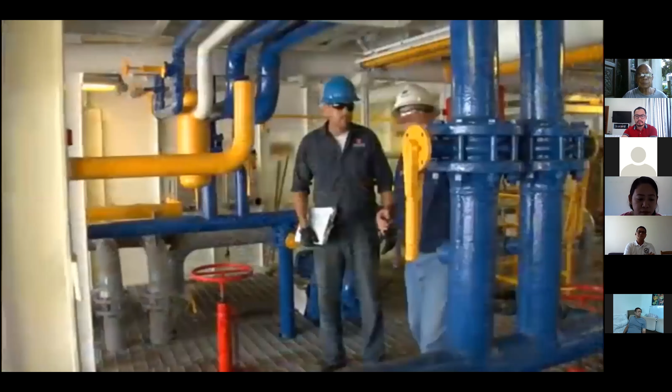While health risks from exposure to low levels of NORM are minimal, the extraction and production of oil, natural gas, or minerals can cause NORM to accumulate in hazardous concentrations, harming internal tissue and organs.

There are 3 basic exposure pathways, or routes of exposure, by which NORM can affect the body. Radiation is the process by which energy is given off in the form of particles or electromagnetic waves.

When unstable atoms decay, they emit radiation as a byproduct. Surface contamination exists when radioactive material is deposited onto a surface.

When ionizing radiation damages cells in the body, the effects can be both short-term or long-term. The most serious long-term effect of radiation exposure is an increased chance of developing cancer.

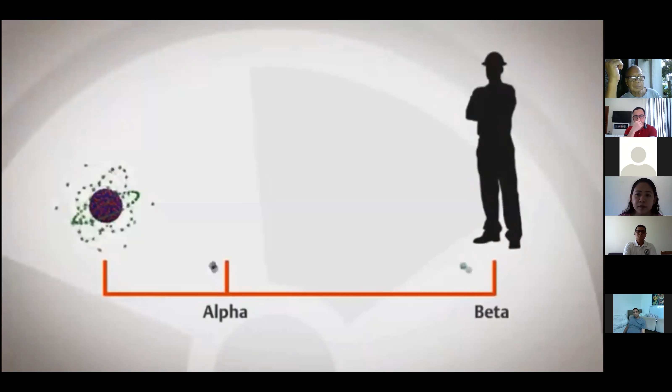When the DNA of a cell is damaged by ionizing radiation, there are 4 possible outcomes. In relation to norm, exposure describes the amount of radiation that is traveling through the air.

Dose describes the amount of radiation absorbed by an object or person. OSHA has set annual radiation dose limits for workers that are occupationally exposed to radiation.

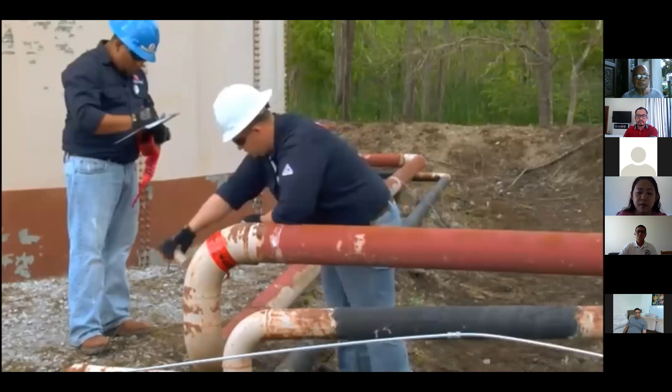Radiation protection programs are required to inform employees when radiation hazards exist, provide sufficient safety training, and supply PPE and protective clothing. To measure radiation levels in the workplace, norm surveys must be conducted and documented by authorized personnel.

When leaving a norm-contaminated area, a full-body scan, known as frisking, must be performed to check for contamination. The low levels of radiation that we are exposed to do not usually present hazards.

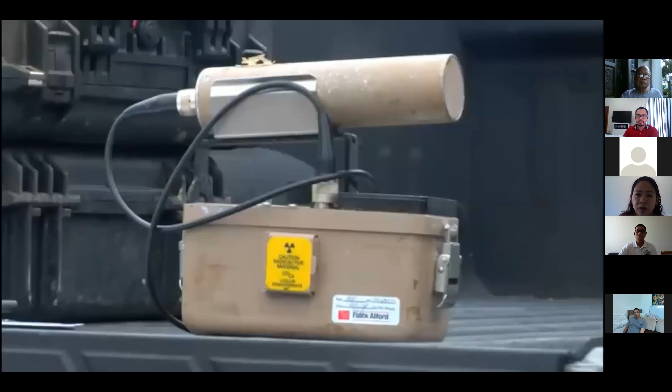While norm rarely poses an immediate danger, hazardous concentrations can accumulate in the body due to chronic exposure. By being aware of norm in the workplace, knowing the current radiation levels, and using control methods, occupational exposure can be kept as low as reasonably achievable.

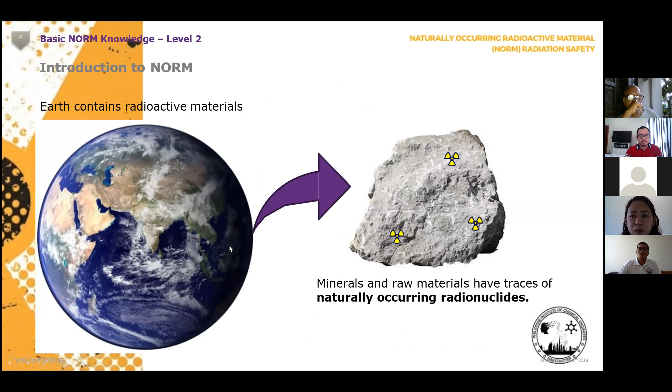So what is NORM all about? Radiation is everywhere - we call it background radiation. It is minerals with traces of naturally occurring radionuclides, which we call natural radioactive materials. So we are continuously exposed to radiation, and 80% comes from natural sources.

This might be radon gas, a very radioactive gas liberated through the surface of land, which can get trapped inside houses. It's around 42% mostly around the world in areas with huge deposits of uranium. Also in food, we have food accounting for 9%, in the form of potassium-40.

So we ourselves are radioactive materials - we possess NORM in our body, as well as soil, and cosmic radiation. When we travel in space, we also receive radioactivity coming from space.

The rest, 20%, is artificial, coming from our medical facilities. So there's a pathway for how NORM is created from its parent radioisotope, uranium - the most stable one is uranium-238. Usually natural radioactive materials only exist at the end of the heaviest element, which is uranium, and the rest is fabricated artificially in the lab.

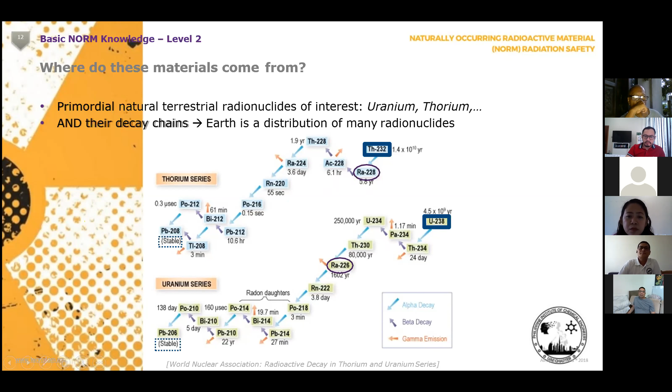So why do we have to bother about NORM? NORM is typically a low ionizing radiation emitting material. However, because of technological intervention, it concentrates and becomes more radioactive due to the volume, and becomes potentially hazardous. So the objective of our waste management is to treat and dispose of NORM as safely as we can.

So why do we have a legal requirement for this? According to IAEA, the International Atomic Energy Agency, certain operations can give rise to significantly enhanced exposure that we need to control by regulation. Meaning, no matter how small it is, it can accumulate through our body as doses.

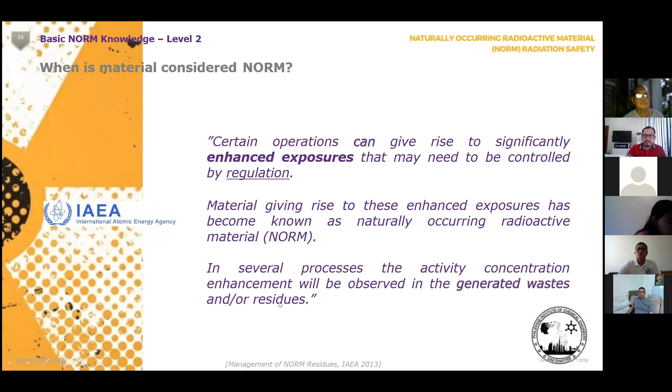So material giving rise to this enhanced exposure has become known as naturally occurring radioactive material, or NORM. In several processes, activity concentration enhancement will be observed in generated waste or residues. This is how IAEA classifies radioactive waste.

It has two characteristics: one is the activity concentration, and the other is half-life. As radioactive material decays according to its half-life, it potentially reaches stability at a certain level, where it can fall below background radiation.

Since NORM is slightly above background level, it is still considered potentially harmful. Because of this long-lived half-life, it is considered that we have to dispose of or immobilize it in order not to contaminate the environment as well as people around us.

So we have to set boundaries for how NORM is considered NORM. The activity level concentration threshold is 1 becquerel per gram. That is what we call background activity. So anything above 1 becquerel per gram is considered potentially harmful, and below it could be safe. We call anything above 1 becquerel a regulated material, and the rest is considered clean.

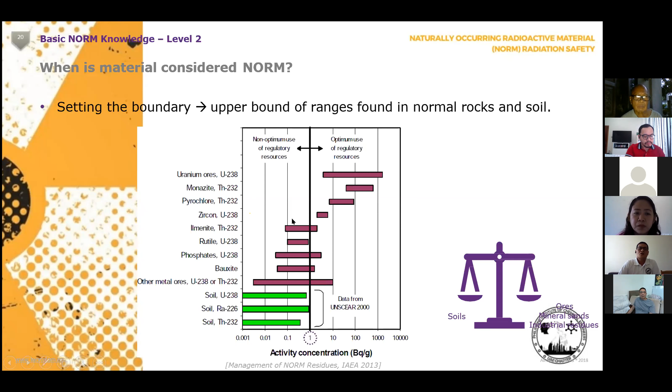According to our regulator here in UAE, which we call FANR, the Federal Authority for Nuclear Regulation, one of the most referenced documents is Regulation 24. It stipulates all the basic safety standards for facilities and activities involving ionizing radiation other than in nuclear facilities.

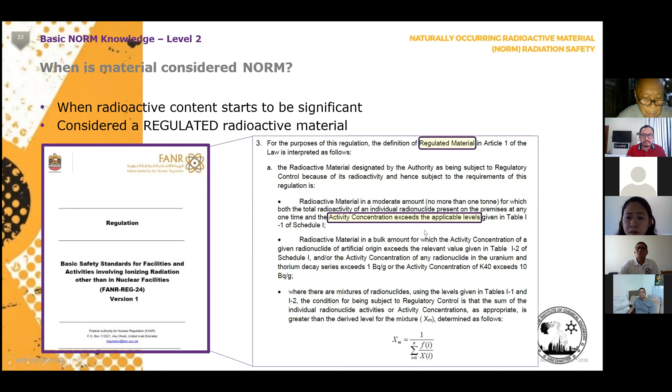Since it states there that possession, manufacturing, handling, storage or disposal of any such material must be under regulation, we are constantly monitored so that activity concentration must not exceed its applicable limits. One of its baselines is anything above activity of 1 becquerel per gram in terms of uranium and thorium chain daughter isotopes; anything above that is considered regulated material, as I've said previously.

So why does K-40, or potassium-40, have 10 becquerel? Because we are more radioactive than our natural background. Mind you, we don't die even though we have such high activity, since it is inherent in food and everything else around us. What matters is the additional radiation that we may absorb or ingest if we become contaminated with any NORM.

So NORM in oil and gas production has two sources. The upstream is exploration, where we provide a path for naturally occurring radionuclides in formation water. In the downstream, it can lead to concentrating NORM, forming sludge in tanks or storage vessels.

So NORM may accumulate in wellheads in the form of scale. It might be on the pipelines, on valves in the Christmas tree, and in oil gas separation it will form as sludge. In gas plants, thin films form as a result of radon gas decay.

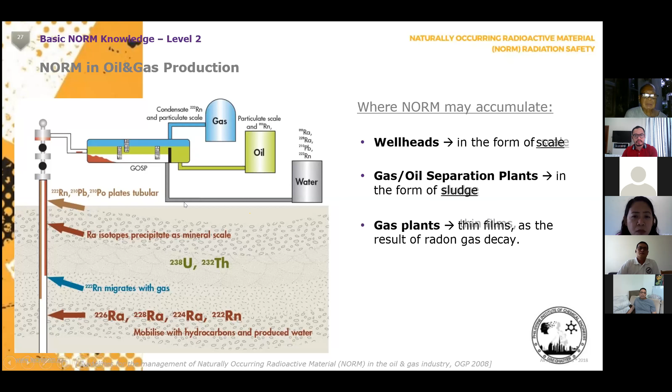NORM can be carried out in two ways. One is by leaching down radium-226, which can be leached as soluble in water, like its counterpart calcium, strontium, and barium, which are typically stable elements, except for radium, which is radioactive. It precipitates out as a chemical reaction from the leaching water as radium sulfate or radium carbonate.

So it builds up scale on the inside of the pipeline, which reduces capacity. Eventually, over long years of operation offshore, they constantly replace pipes because the capacity of oil flow is being reduced. Because of the regulation, they either descale it, or basically the only way is to descale it.

And those decontaminated metallic parts can be cleared, and we can recycle them as well, but not back to their original purpose—they can be smelted down to become a new material.

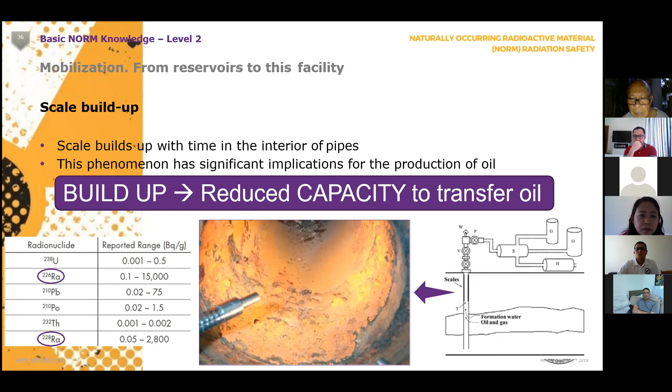So sludge can be accumulated in tank bottoms, gas oil separators, dehydration vessels, storage tanks, and waste bins. Other items in between are called miscellaneous, and these are valves with a very odd shape, which we manually descale in our facilities.

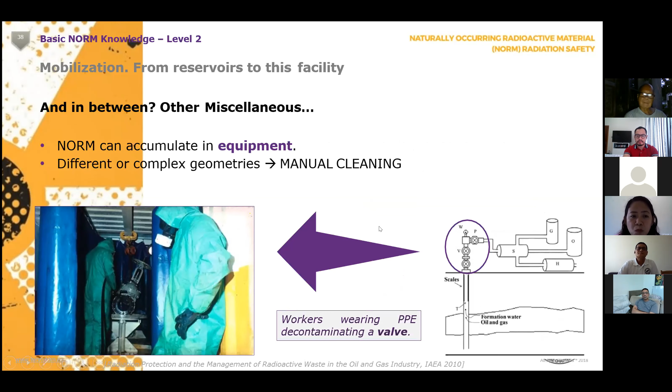So from the two major sources of radioactive waste material, scales and sludge, the third one can be miscellaneous equipment. They can be considered as burnables or non-burnables.

Upon accepting it in our facility, we have to make sure they can be characterized as dictated by the regulation. Any analysis data provided by OPCO as per Waste Transfer Protocol, or WTP, must be verified by radioactive waste characterization. We use special equipment called high resolution gamma spectrometry to detect very low ionizing gamma radiation. Samples are analyzed in the facility by our laboratory, reading with handheld equipment to make sure we know the dose being emitted while it is inside containment.

An analysis of packages must be verified as well. It should be stable. So characterization is one important tool to make sure that everything will be safe in our facility.

There are only two potential hazards here: external exposure in terms of gamma radiation or ionizing radiation, which is in fact very low, but the most hazardous one is physical contamination of NORM. It can have three routes: either you inhale it through inhalation, or you ingest it, or it can be absorbed by skin or any kind of open wounds.

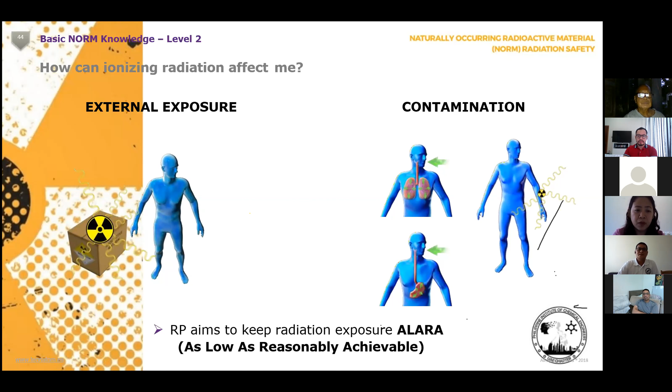So radiation protection aims to keep radiation exposure as low as reasonably achievable. This is the end of my short background on NORM. I'm going to show you now about the IAEA waste management of radioactive materials in the next video.

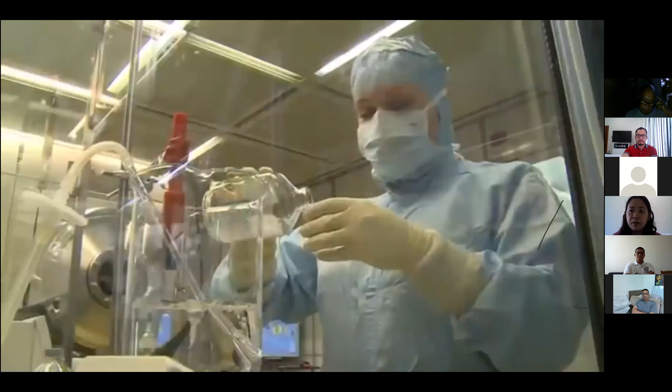In Austria, technicians check the welding on pipes for a hydropower plant. Over in Indonesia, spices are being cleared of biological contaminants. In Budapest, pharmaceuticals are being created. And operators run a Chinese power plant that provides electricity to thousands of homes. These are common activities, taking place every day in many parts of the world.

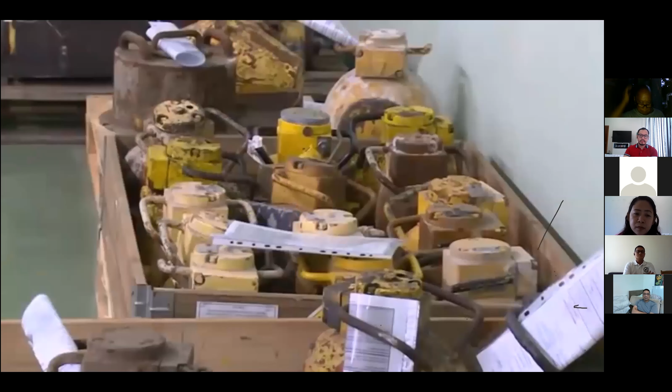They rely on nuclear technologies that use radioactive materials. The benefits of these technologies, whether used in agriculture, industry, or medicine, are plentiful. Like other processes, they generate waste, and this waste contains radioactive elements. People and the environment must be protected from the potential hazards of such waste, now and in the future. So countries need to manage their radioactive waste safely and securely, and make sure it's kept under control.

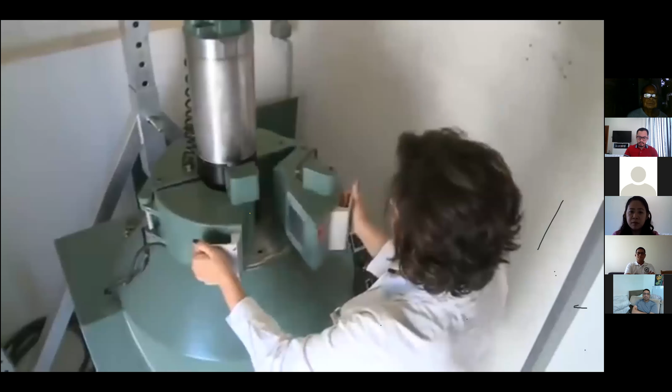This responsibility starts as soon as a country decides to use nuclear technologies. And techniques are available to manage radioactive waste.

Radioactive elements are unstable and emit radiation as they decay. The decay rate is measured in half-lives. This means the time it takes for the activity of a radionuclide to halve. After another half-life period, the activity is again down by half. This continues, and eventually the material emits only negligible amounts of ionizing radiation.

Each radionuclide has its own half-life, so waste can be hazardous for periods of time stretching from a few hours or days up to hundreds of thousands of years.

Radioactive waste is classified depending on the half-lives and the level of radioactivity of the nuclides it contains. According to the IAEA's safety standards, there are 6 classes of radioactive waste. Each waste class has different management and disposal needs. Techniques exist to manage this radioactive waste and the spent nuclear fuel from power plants and research reactors in a safe and secure way.

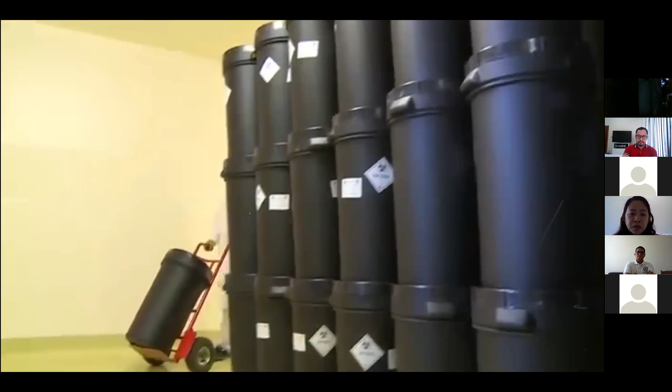Waste containing only radionuclides with very short half-lives can be stored for a few days or years to allow for the decay of the nuclides. This type of waste is usually generated when radioactive materials are used for research or medical purposes. Eventually, it can be disposed of as conventional waste.

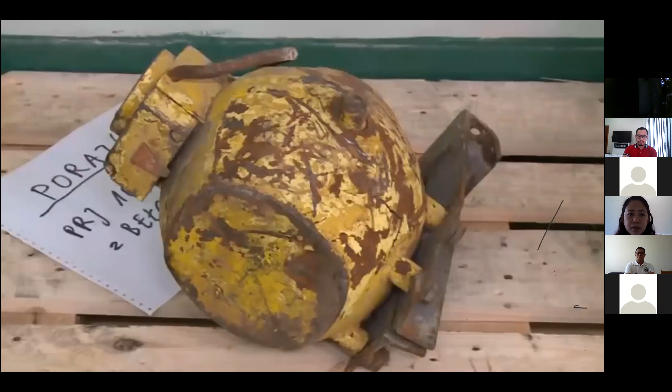Other waste forms need to be managed for radioactive waste disposal. By volume, most radioactive waste has low levels of radioactivity. This includes the majority of the waste that comes from the routine operation of a nuclear power plant, and waste that's produced when medical and industrial devices that use radioactive sources are no longer needed.

This could be because the source has decayed and the remaining radioactivity isn't strong enough for its original purpose, or the device is damaged or obsolete. In these cases, the radioactive source needs to be removed from the equipment and prepared for storage and eventual disposal.

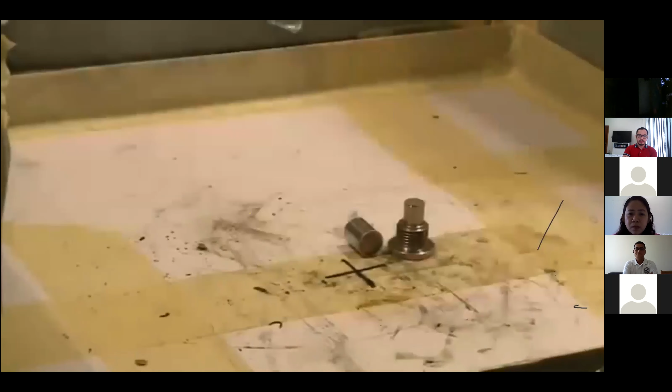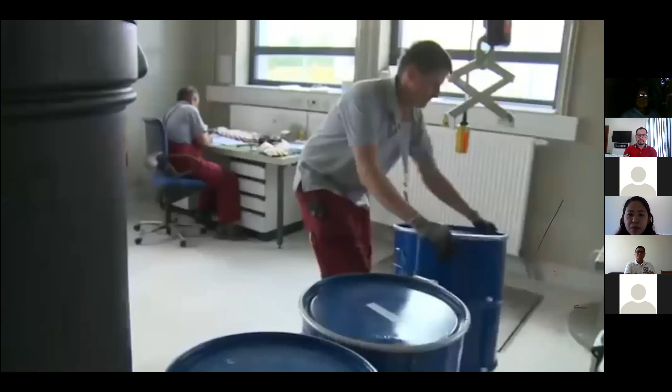Some countries process their waste at centralized waste management and storage facilities. Upon arrival, the waste is controlled to check for any surface contamination, and the radiation levels are measured. Details of the waste type are noted for the inventory before the waste can be processed further to prepare it for storage and disposal. Such processes can involve measures to reduce the volume of the waste, such as compaction and incineration.

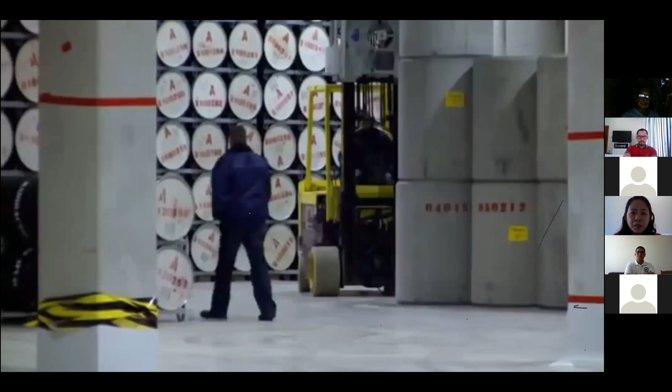Encapsulation is used to immobilize the contaminants. After being placed in appropriate containers, the waste is stored. It will remain in this kind of facility until a suitable place or system for its disposal is established.

Many countries already have near-surface disposal sites for waste with low levels of radioactivity. These facilities can consist of silos in the ground, trenches, or vaults. Once they're full, they will be backfilled with grout or soil, sealed and closed according to their disposal license.

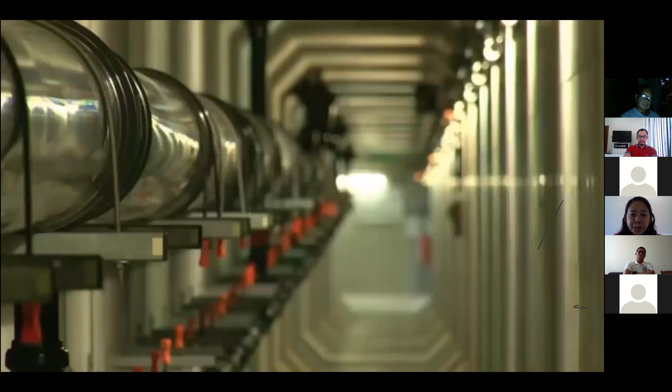Alongside the radioactive waste produced by the routine activities at a nuclear power plant, nuclear power generation produces spent fuel or high-level waste. Such waste is low in volume, but has a high level of radioactivity, and it remains hazardous for thousands of years.

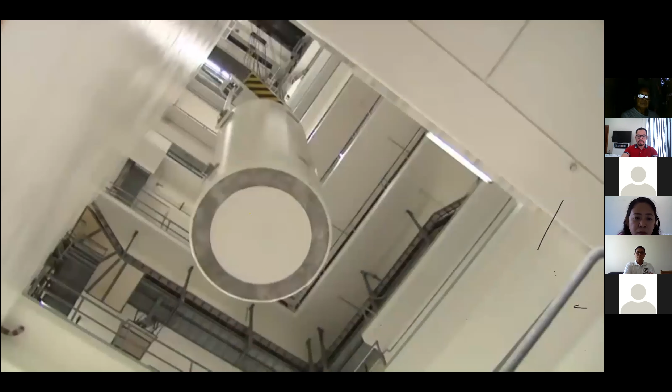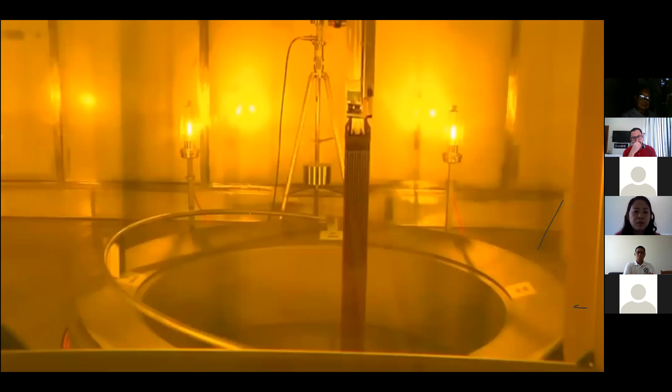In some countries, the spent nuclear fuel that can no longer be used to generate electricity is reprocessed to extract usable material for new fuel. Other countries consider the spent fuel as waste for direct disposal. In all countries generating nuclear power, the spent fuel is currently stored either in water pools or dry casks at secure storage facilities.

Waste management experts around the world agree that underground geological disposal is the best and preferred option as a solution for high-level waste and spent nuclear fuel. This would be in a location where geological conditions are stable and the waste can be contained and isolated from humans and the environment until it no longer presents a hazard.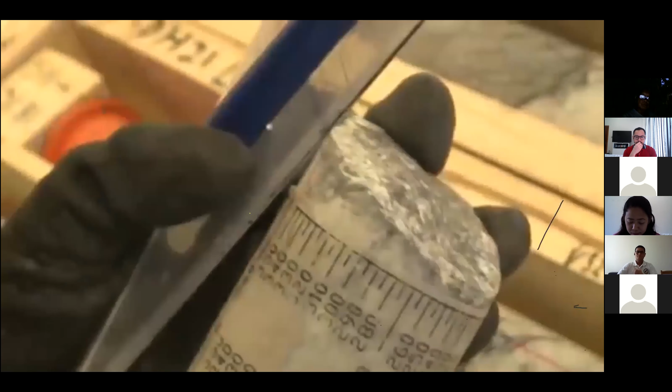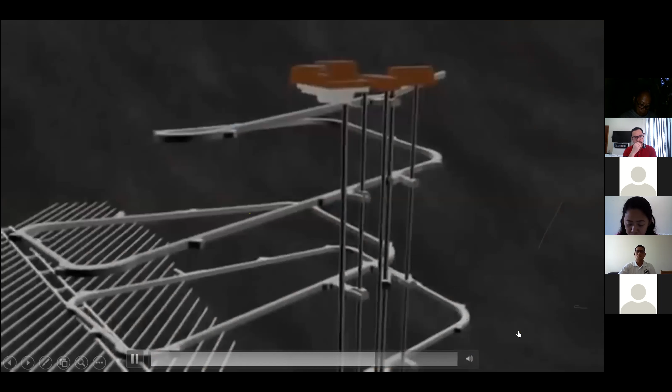While there's still no geological disposal facility of this type in operation, some countries have already selected a location, designed the facility, and conducted safety assessments. A few, for example Sweden, Finland, and France, are well advanced in their development. Radioactive waste with low and intermediate levels of activity is already being disposed of in geological facilities in several countries.

Since its inception, the IAEA has assisted its member states to safely manage their radioactive waste. The IAEA produces internationally respected safety standards and offers technical guidance. At its headquarters in Vienna, Austria, the IAEA hosts meetings and workshops, bringing together experts from around the world to exchange experiences.

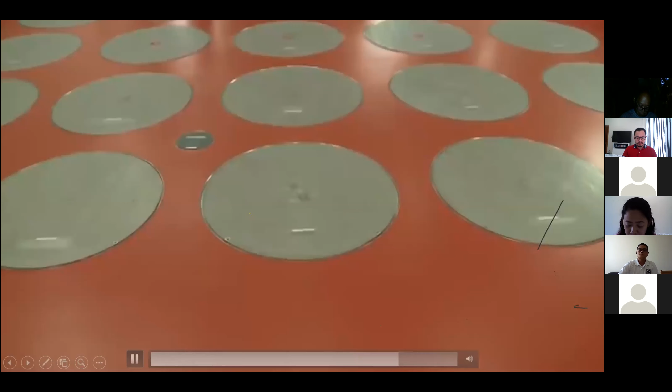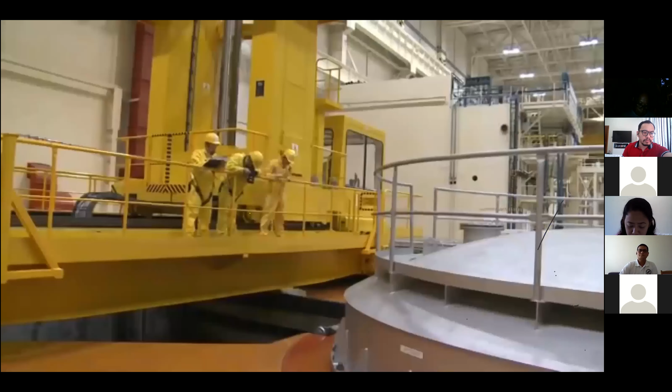International teams, led by the IAEA, review security measures at waste storage facilities. The IAEA also helps countries to securely store high-activity sources in advance of disposal. Its experts run training courses in radioactive waste management and conduct missions worldwide to assist with the conditioning of disused, sealed radioactive sources. Its safeguards inspectors make sure that all nuclear material, including spent nuclear fuel, is accounted for and used solely for peaceful purposes.

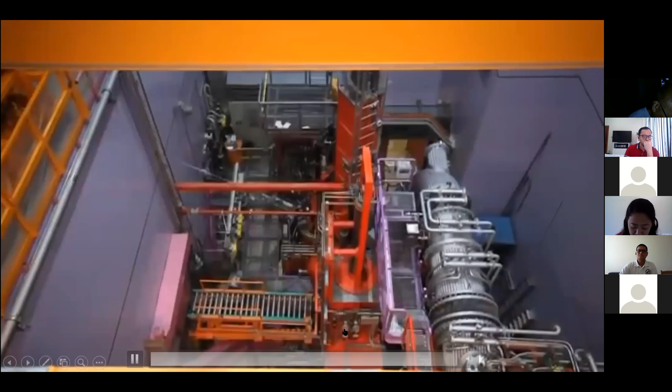As populations grow and nations develop, we'll be making more use of nuclear technologies. This will result in more radioactive waste, and more waste means more needs to be done to meet the challenges. With the technologies now available, the new developments in the pipeline, and the continuous support of the IAEA, countries are well equipped to manage radioactive waste safely and securely.

Okay, on the next slide, it's a movie clip, a similar process to where in the UK our technology came from, except for one part of the process, the incinerator. Let's take a look at it.

Descaling. Decontamination. Delivered like never before.

Norm Solutions provides an all-in-one service for the management of naturally occurring radioactive materials, also known as NORM. We are able to handle and decontaminate a wide range of materials from oil and gas production, including tubulars, valves, filters, Christmas trees, umbilicals and risers, as well as handling contaminated sludges, sands, pig wax and PPE. Our facility in Aberdeen has substantial storage capacity and full RSA authorisation from the Scottish Environment Protection Agency, meaning we can handle NORM items and equipment from decommissioning, offshore activities and other large projects.

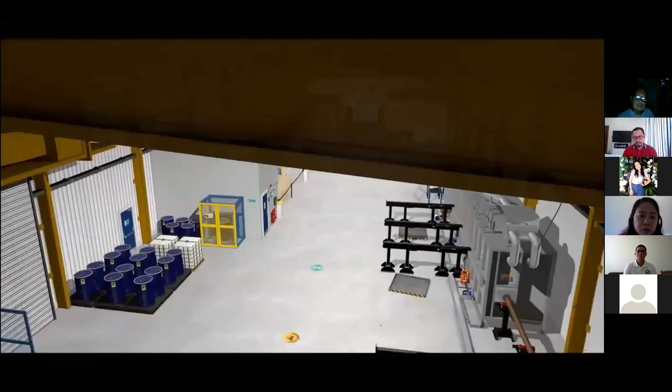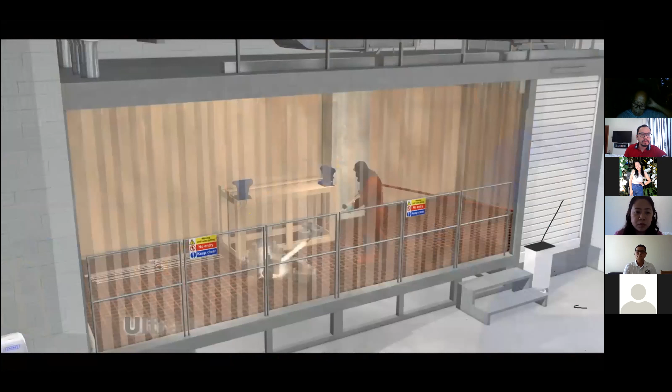NORM items arrive on site, are booked in and then are safely stored before processing begins. Our processes are dismantling, decontamination, tubular descaling, water treatment and scale disposal. Where required, equipment is transferred to the strip-down bay and dismantled into its component parts in preparation for decontamination. Individual parts are then descaled using ultra-high pressure jetting. Tubulars have a standard shape, so are treated using an automated high-pressure jetting process that minimizes human exposure.

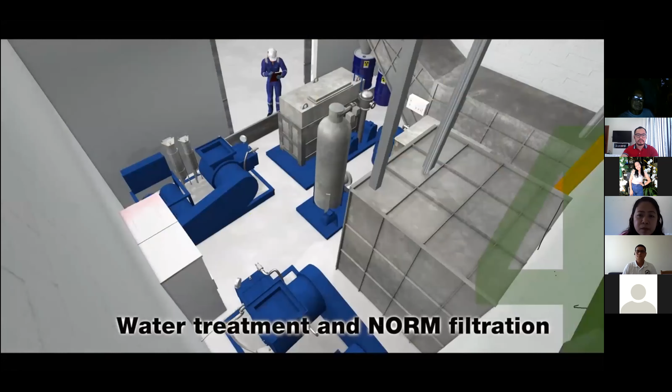Finally, the resulting NORM material from each activity is filtered and treated. The filtered NORM scale is collected and treated prior to being transferred to a suitably permitted disposal facility. Decontaminated water is recycled back into the system, and as all activity takes place in a fully enclosed environment, there are no discharges to the atmosphere or water systems. NORM Solutions is a joint venture between metal recycling and trading group John Lawrie and hazardous waste management specialists Enviroco. Ask us about your descaling needs today.

Except for one, I highlighted this incinerator because this is the heart of our waste treatment facility. However, the incinerator is the ultimate solution for most of our waste management, especially in our country. We have a big problem with domestic waste, so I'm going to highlight this incinerator, even though we can incinerate highly or extremely hazardous material like NORM. So why not use this as a solution for our domestic waste?

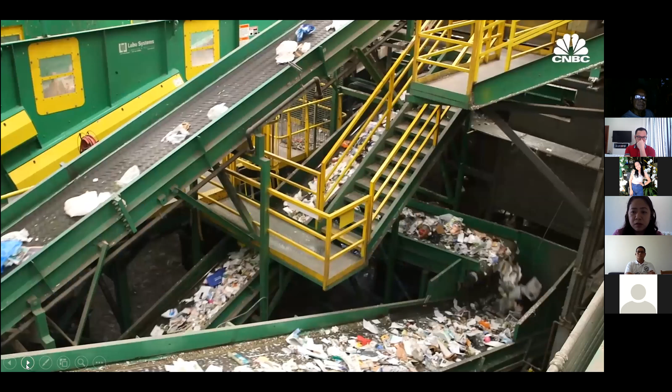Our society produces a lot of waste, over 2 billion tons per year, a number that's expected to grow by 70% by 2050. That's a line of garbage trucks stretching from San Francisco to New York City every single day. Organic materials in landfills decompose and produce methane, a very potent greenhouse gas. Solid waste, plastics, paper, cardboard, there's a lot of energy within those, carbon and hydrogen. Why don't you do something useful with it? Converting waste into energy is not a new idea. Usually, though, this has meant incineration, that is, burning our trash to recover some energy.

But that has major drawbacks. Incineration creates toxic ash and hazardous chemicals called dioxins, and heat and electricity are pretty much the only usable outputs.

A better solution may lie in gasification, an old technology which has only recently been repurposed as a way to deal with our waste. Gasification companies don't burn trash. Instead, they turn it into a gas, in a process that they say is both economical and eco-friendly.

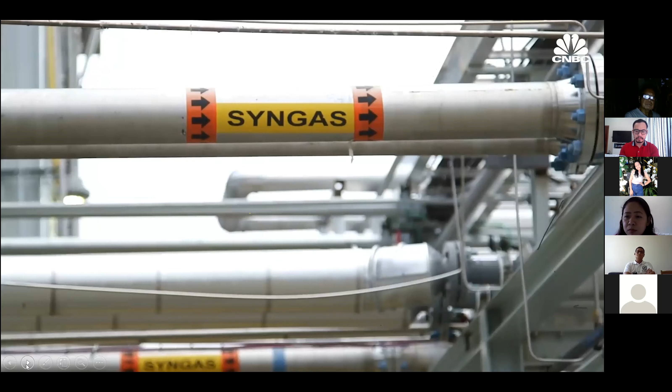The focus is on producing a good quality syngas that can be converted into higher value energy products on the back end, be it electricity, hydrogen, diesel fuel, possibly even chemicals, fertilizer, etc. in the future. It's an exciting idea, and some major players, including the Bill Gates-led fund Breakthrough Energy Ventures, have thrown their weight behind it.

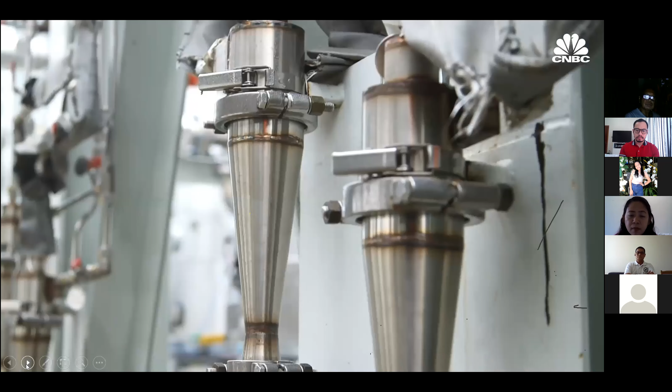While in the past, gasification companies have struggled to scale up and meet their energy production targets, now companies like Sierra Energy, Enerkem, and Plasco say they're ready to commercialize and expand. I think we have over 9,000 interested parties from around the world who've contacted us already. The question is, how quickly can we get one? The answer is soon.

The world's first municipal waste incinerator was built in 1874 in Nottingham, England. And like incinerators of today, it converted trash into ash, gas, and heat via combustion. Initially, the purpose was just to shrink our waste. Eventually, though, Great Britain and Germany did start recovering energy from the process, but the idea didn't really catch on in the US.

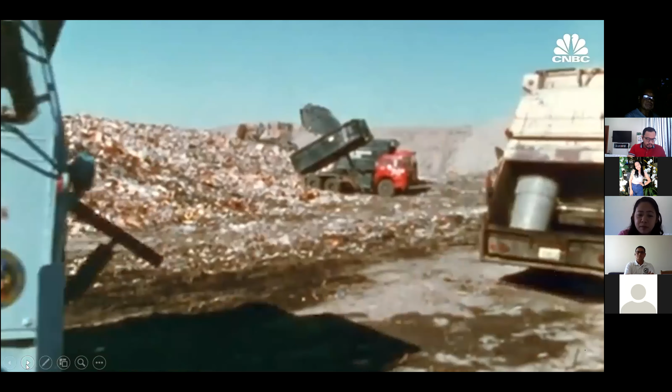Domestic electricity prices were already low, and as emission standards tightened, incineration got even more expensive as compared to landfilling. It wasn't until the oil embargo and resulting energy crisis in the 1970s that the US really took an interest in waste-to-energy tech. Over 100 waste-to-energy incineration plants were built, but when fuel prices dropped, interest waned.

You see a lot of interest in this waste conversion or biomass conversion when the fuel price is really expensive. And then when the fuel price drops, nobody really cares. Today, there are about 70 waste-to-energy plants in the US, and the number is declining.

But globally, many European countries still rely heavily on incineration, and Japan and China have been building waste-to-energy incinerators at a rapid clip. But many environmentalists say we need a better solution.

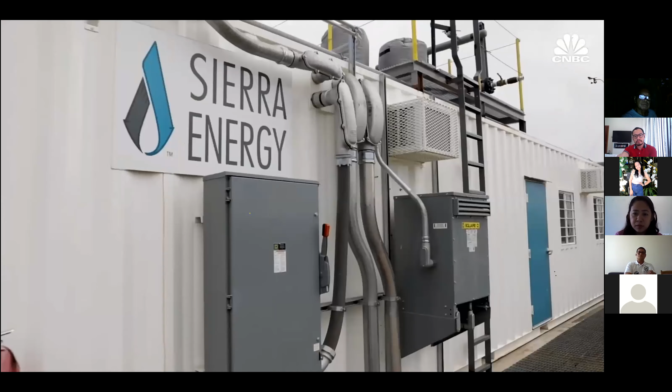Incinerators still emit harmful pollutants, especially in countries with lax environmental regulations. So burning waste to get rid of it may appear to be cheap, but the long-term health consequences for the community are terrible. So companies like Sierra Energy are looking towards gasification, an old technology that proponents hope to repurpose as a cleaner and more economical waste-to-energy solution.

In the gasification process, materials aren't combusted. No toxic ash or dioxins are produced. Instead, a highly controlled amount of oxygen or steam reacts with the waste, turning it into a gaseous mixture of carbon monoxide, hydrogen, and other elements.

This synthetic gas has applications beyond electricity generation. It can be converted into high-value products like diesel fuel, hydrogen fuel, or ethanol. So even if electricity prices stay low, there'll be a market for these outputs.

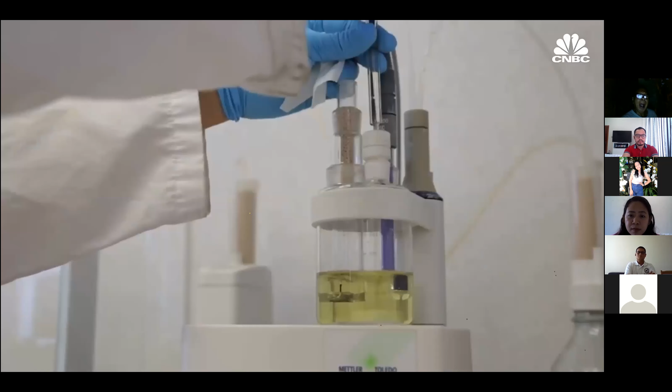We see much more value in chemicals and biofuels. Methanol is an important building block in the chemical industry. Ethanol, of course, can be blended in fuels. In this way, waste-to-energy gasification plants have both upstream and downstream revenue potential.

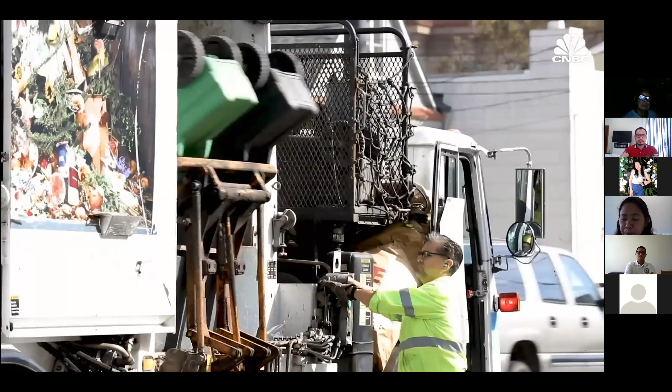On one side, you're being paid to take garbage that normally would be dumped into a landfill. So that's one source of revenue. You then take that waste and you turn it into recycled products. Those products have very high value. And so from a business model perspective, you're getting paid on both ends.

But a main challenge facing companies like Sierra Energy, Enerkem, and Plasco is dealing with the unpredictability of using municipal solid waste as the fuel. Globally, there are hundreds of gasification plants that generate electricity from fossil fuels like coal, but waste-to-energy gasification is a whole different game. Tailoring your gasification when your fuel changes over time is the holy grail.

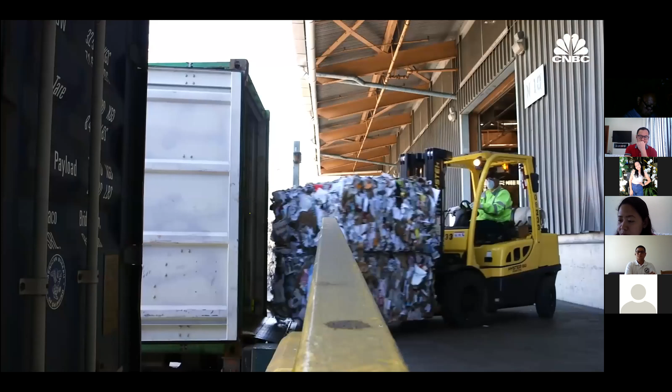And if they can consistently gasify and produce their syngas from these waste materials, even if the content changes, that's an exciting option. Here are some of the main players taking that plunge.

Davis, California-based Sierra Energy was founded in 2004. Back then, CEO Mike Hart, who is also the CEO of Sierra Railroad Company, was seeking to improve the fuel efficiency of his locomotive fleet. We were trying to figure out a way to make our own fuel. We wanted to do something better than diesel.

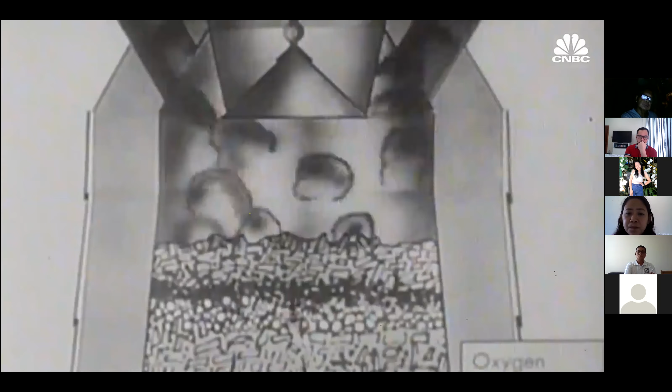He was judging a business competition at UC Davis when he heard about how blast furnaces, one of mankind's oldest technologies, could be used to convert any mixture of materials into a usable synthetic gas. Hart bought the patents to this technology, and Sierra Energy was born.

Over time, its mission expanded far beyond its initial reach.

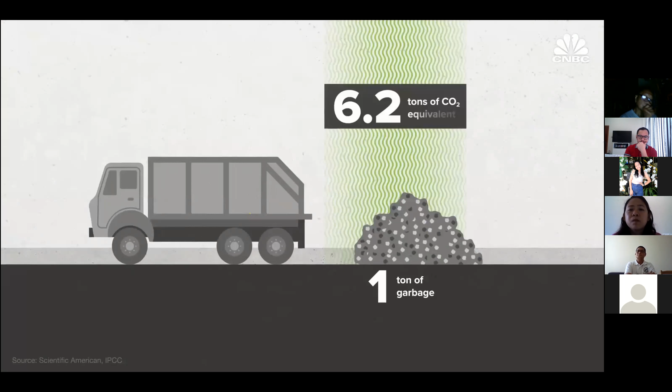People are realizing that climate change is a very real problem. When you throw away one ton of garbage, every ton is about 6.2 tons of CO2 equivalent that goes into the atmosphere in the form of methane. Methane is 86 times more potent a climate change gas than CO2 over a 20-year period. Our technology provides one way of trying to address that problem.

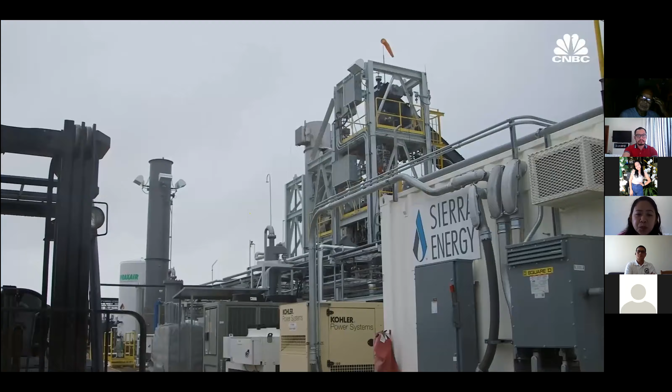Last July, Sierra Energy closed its $33 million Series A funding round, led by Breakthrough Energy Ventures, the Bill Gates-led investor fund that also includes Marc Benioff, Jeff Bezos, and Richard Branson. Now, the company has partnered with the Department of Defense to develop its first small-scale commercial facility at Fort Hunter Liggett in Monterey County, California.

This demo facility can handle 20 tons of waste per day, and if all goes according to plan, it will begin processing trash in early 2020.

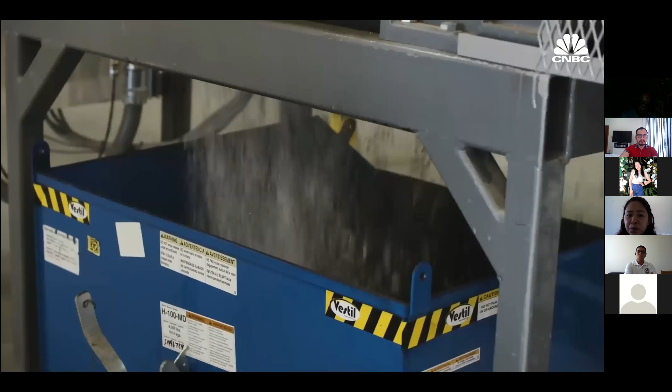Ultimately, Sierra Energy says what sets them apart is their use of the blast furnace, a centuries-old technology in the iron and steel industry. Here's how it works.

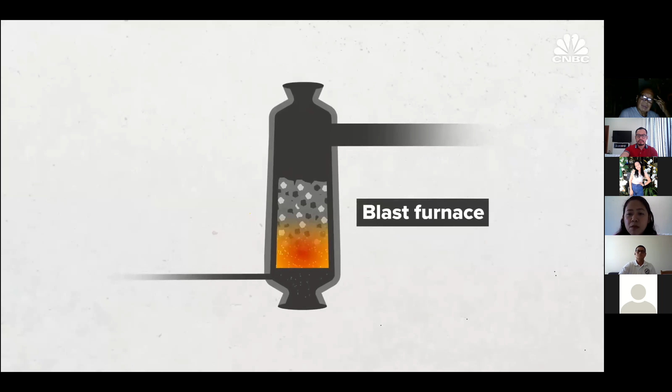A blast furnace, which is the technology platform that Sierra Energy uses, is a high-temperature vessel. Solid materials go in at the top, injectant gases are placed in at the bottom, and you have a big countercurrent heat exchanger. We're injecting oxygen and steam at the base instead of hot air, and at the top we're placing in solid waste materials instead of those mined materials from the ground. Instead of the focus being producing good quality metal out the bottom, our focus is on making a good quality syngas, synthesis gas, out the top of the vessel.

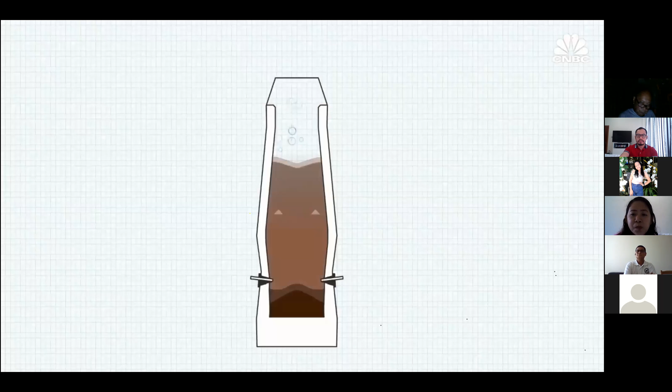Once the syngas is produced, the local community or developer will decide what to do with it. The company lists electricity, hydrogen, renewable diesel fuel, and ammonia as likely end products. About 10% of the waste material can't be converted to gas, and so is instead turned into a stone that can be used as construction material.

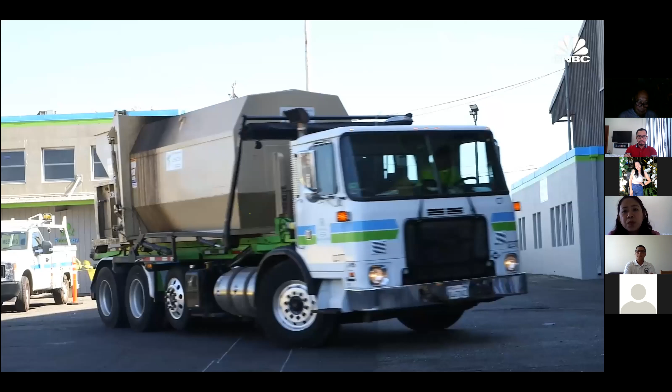Because of this wide variety of use cases, it's hard to say for sure exactly how clean the end-to-end process will be. It really depends on the specifics of the project, how far waste is having to be brought to the location, and some of the configuration of the plant itself. Hart is confident, though, that in almost every case it will be carbon negative, because even if you're making electricity or diesel for a vehicle, the amount of pollution that comes out of the tailpipe or smokestack is less than the amount of emissions that you're offsetting in the first place.

Furthermore, Sierra Energy's plant doesn't rely on external energy to operate. Instead, Hart says that about 20% of the energy created is used to run the plant itself. So by some people's analysis, you can make this carbon negative or carbon neutral. By other analysis, you can't quite get there, but it's certainly cleaner than fossil natural gas.

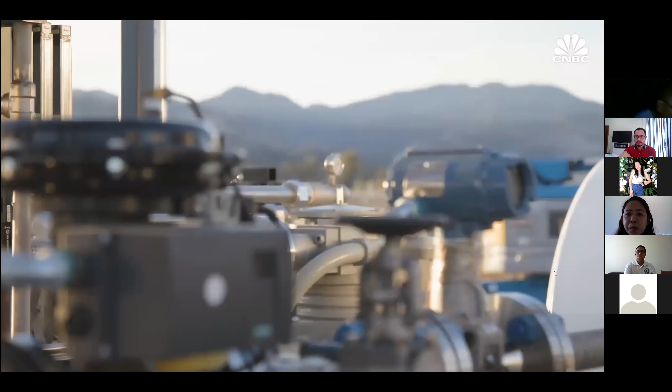Over the next few years, Hart says the company plans to build out community-scale systems that can handle about 50 tons of waste per day, the equivalent of approximately 50,000 people's trash. If we want to have an impact on that 13.2 billion tons a year of greenhouse gas, we need to have thousands of these systems around the world as quickly as possible. That's our goal as a company.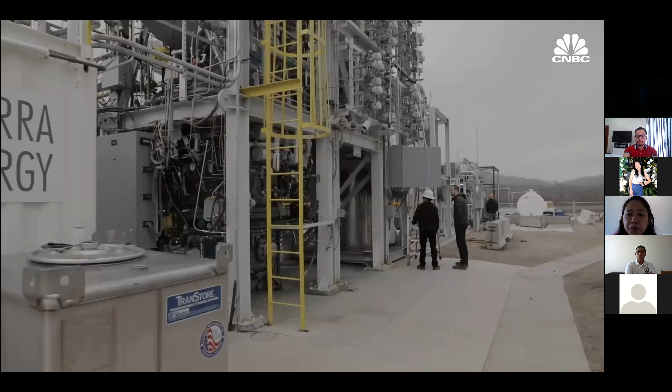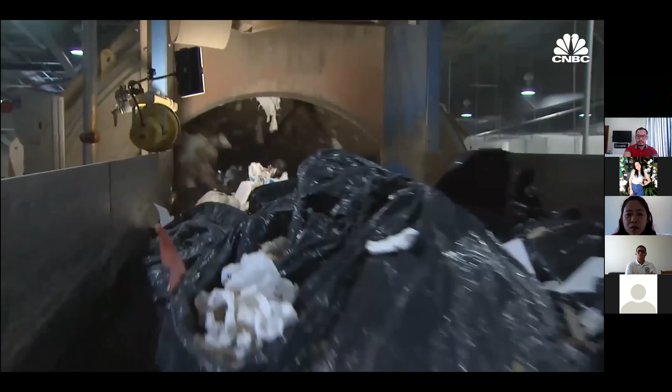While Sierra Energy's most recent funding round has put it in the spotlight, there are a number of other veterans in this space. Two of the biggest are Plasco Conversion Technologies, founded in 2005, and Enerkem, founded in 2000. Like Sierra Energy, both aim to turn municipal solid waste into valuable end products through gasification. But unlike Sierra Energy, these two companies have actually accumulated years of firsthand experience operating full-scale gasification plants, dealing with their fair share of delays and setbacks along the way.

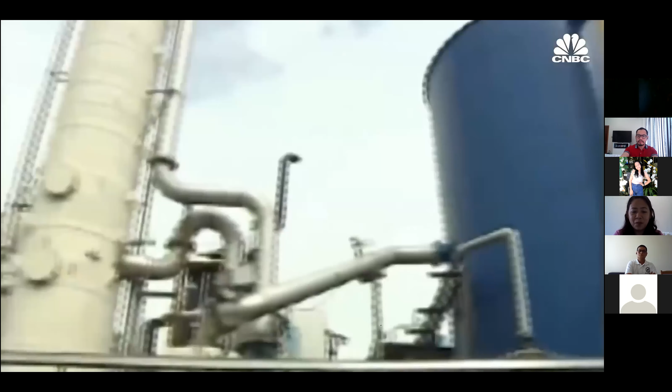Plasco Conversion Technologies uses plasma to refine the waste from gasification into a clean syngas. The company operated a large demonstration facility in Ottawa from January 2008 to January 2015, capable of accepting 135 tons of waste per day. Eventually, Plasco got approval to build a commercial-scale plant, and though the company raised over $300 million, it ultimately wasn't enough. The new plant was never built, the demo facility shut down, and Ottawa severed ties with the company.

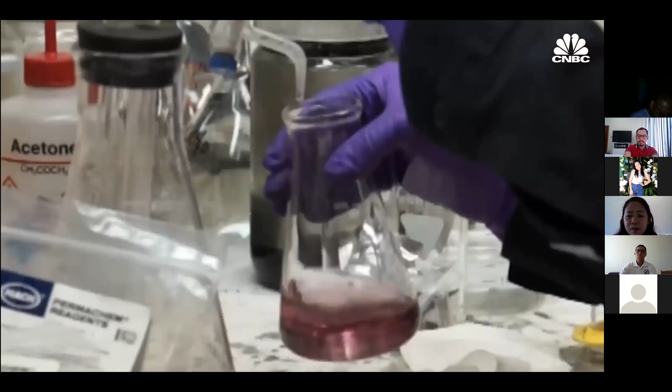But Plasco kept chugging along and re-emerged with a new outlook on the market. We put in 1.2 million man-hours and a decade of work and $407 million. We can tell you many ways it doesn't work, and what we do now does work. In the process, we realized that the waste-to-electricity market, the waste-to-energy market, was going away. Unable to compete with the low price of natural gas, Plasco now aims to produce synthetic fuels for use in internal combustion engines, which can power cars, planes, and trains.

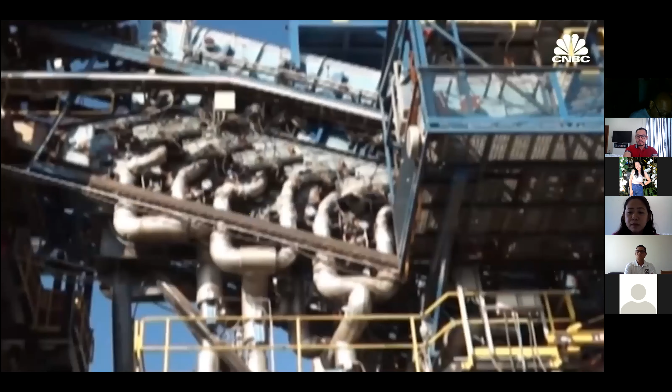The company no longer operates any plants, but it says there are a number of projects in the works. For these future endeavors, Plasco has slimmed down its business model. We aren't doing build, own, operate, transfer anymore. We're doing selling the equipment and the technology. So we restricted what we did so we weren't in competition with the entire world, but more in cooperation.

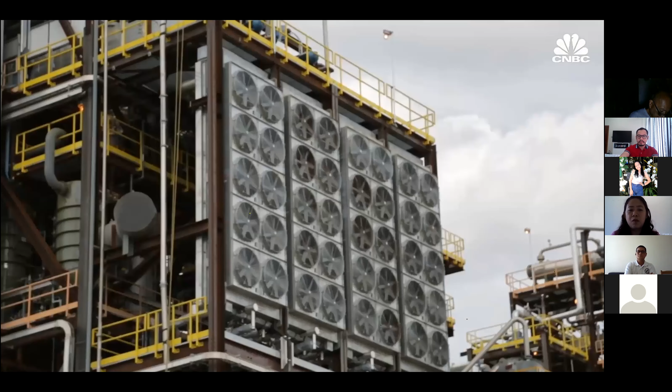Another player, Enerkem, developed the world's first commercial waste-to-biofuels facility of its kind. It's been operating in Edmonton, Canada since 2014, and is currently focusing on turning trash into ethanol biofuel and chemicals like methanol. It's a facility that can take up to 100,000 tons per year of waste, around 300 tons per day. This size would represent a community of around 500,000 to 700,000 inhabitants.

This plant uses a technology called a fluidized bed gasifier, in which the trash is dropped into a bed of hot sand, oxygen, and steam. The precise mixture causes the waste to heat up and turn immediately into gas.

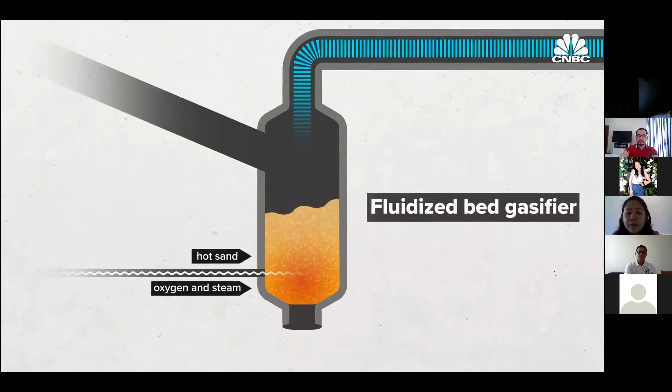But Enerkem has also faced challenges as it scaled up. The company initially predicted its first plant would operate at full capacity by 2012, but it still isn't there yet. The company won't reveal how close it is to full-scale operation, but Chornet says that despite the delays, he's glad that his company is taking the time to get it right. We're really proud that we did not skip any steps.

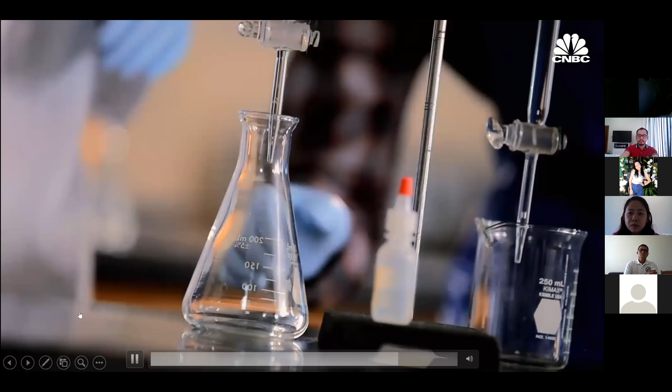However, this comes at a cost. So we have both a patient approach and a realistic approach for innovations of this scale, and also we have an enormous database as well as operation time at commercial level. So these three aspects really differentiate us.

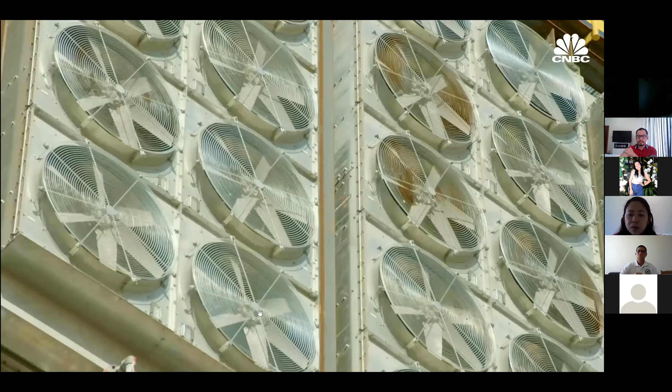In its 20-year history, Enerkem has raised $616.5 million and now has plans to build additional facilities in the Netherlands, Spain, the UK, and Canada. It's one of the most well-established companies in the space, but with just one commercial facility, there's still plenty of room for others to play catch-up and learn from what's worked and what hasn't.

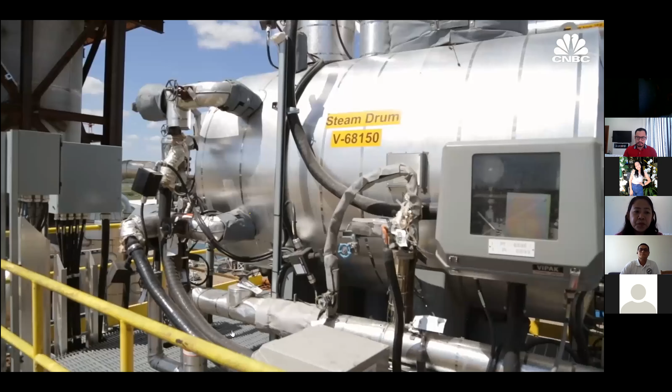Everyone likes to be in the race to be number 2. The idea is the first plant, the pilot plant, is more expensive, so you'd rather learn from somebody else. On this topic, I'm not at all worried. The first one at large scale may have some kinks in it, but it's also likely to get some of the best subsidies and deals from the municipality.

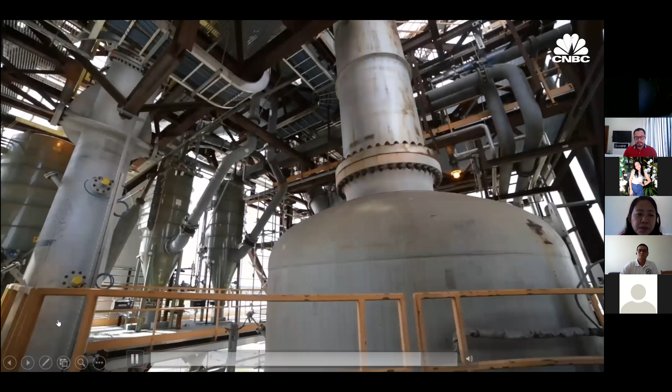These potential subsidies, alongside other policy drivers, stand to play a major role in determining how quickly this tech spreads. So the future for gasifiers is, in my view, more tied to the economics of the climate change story, the prices on carbon, the prohibitions on emitting any fossil fuels, than it is on the technology, which we've known about for a long time.

Given current policies, such as California's low carbon fuel standard, Sierra Energy says it could build many more plants, but not on the scale that they'd like to see eventually. To get to hundreds is very feasible, but to get to many thousands, that will need different regions of the world to step up and force people to divert waste from the landfill.

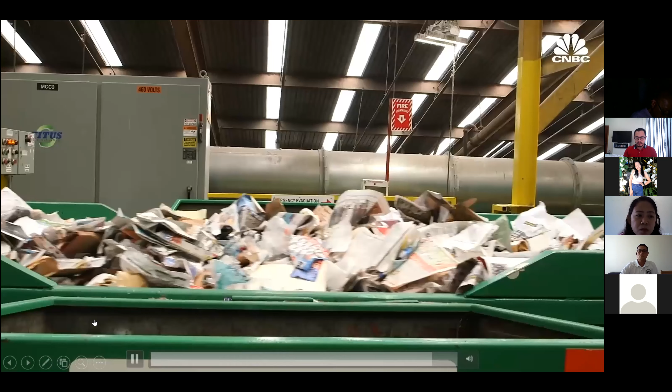This could look like higher landfilling fees, carbon credits, carbon taxes, emissions regulations, or subsidies. Any and all would be a boon, so long as these gasification companies can operate as cleanly as they claim.

But as climate policies and priorities shift in tandem with election cycles, it can be hard for this tech to establish a strong foothold. Once we know, okay, this is the policy that we're going to stick with for 10 years, I think there will be a lot of confidence for these investors. But if you don't know what the policy is going to be in every 2 years or 3 years or 4 years, it's very difficult to make any decision.